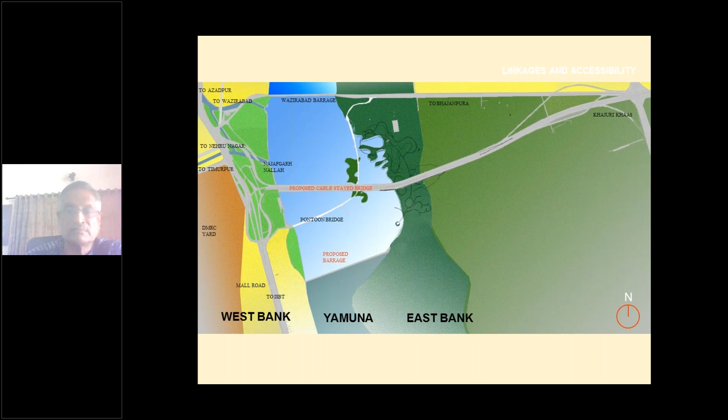Based on this, the project as such, right in the beginning, was a complete tourism destination for that part. After the concept was prepared, it was presented to the Delhi government.

It was decided to divide the project into two: one is the tourism destination, which has a number of very unique tourism elements, and the other is the bridge itself. A decision was taken that for the first part, we do the bridge first, and then take up the tourism destination part later.

So that decision was taken, and then we started working on the detailed design of the bridge. Right in the beginning, we divided the entire bridge project into three parts: the western approach, the eastern approach, and the bridge itself. These were the three things, and we know that the bridge became a signature bridge.

We have discussed in detail how it became a signature bridge. It is because of the background of the Commonwealth Games, and the Chief Minister of Delhi, Mrs. Sheila Dikshit, was very keen that we should create a structure which has not been done anywhere else in the world. That challenge was taken up by the consultants and Delhi Tourism, and it was decided to have a signature bridge which should become a signature structure for the capital of this country.

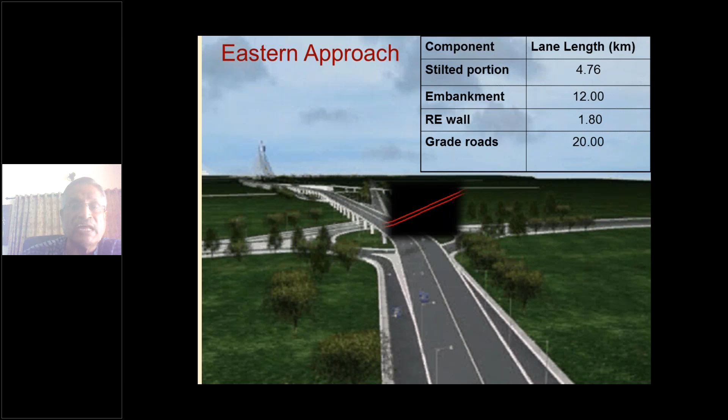And we come to the structure that we are going to discuss today, the signature bridge. After a lot of discussions, which we covered in detail last time, it was decided by a high-powered committee, including the cabinet of Delhi, that a structure of this particular shape would be adequate and good, and probably that kind of structure does not exist anywhere else.

So this is a slightly backward slanting unsymmetrical pylon, unlike the normal cable-stayed bridge. It is a cable-stayed bridge, but it is unsymmetrical, totally slanting backwards, and with a set of cables in the front, supporting a free span of 251 meters, and 4 pairs of backstays to take care of the variations in the loads. So ultimately, structurally, visually, it is a very striking and beautiful, dynamic looking bridge.

And in the structural view also, it can be said that it is a very ingenious and dynamic concept, because what is happening here is the weight of the pylon is carrying the weight of the deck. The pylon is trying to fall back, which is kept in place by the deck, and vice versa. Any change in the load due to live load or any other thing will be taken care of by the 4 sets of backstays. So this is the concept. So it is a structurally dynamic structure, very striking and very challenging, both in its design as well as in its execution.

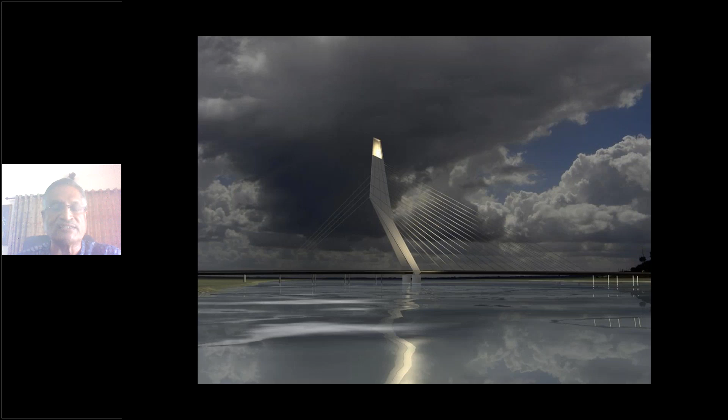It will have a viewing platform on the top, totally glass, almost 25 meters high. People can go to the top through the lifts within the structure, reach the top, and have a nice view of the city of Delhi. This will be almost 165 meters above the river level or deck level, so almost twice the height of Qutub Minar. Qutub Minar is about 75 meters, and this is about 165 meters. So this is the basic concept which is approved.

So this is the way it should look. This was the idea. The designers have been very ingenious, that they were able to simplify such a complex thing in creating the structural elements to decide the load path. So essentially, it is like an open book on the top, 2 sheets trying to open or close, which is supported by two legs splayed in either direction and held in position, pulled from the other direction by 16 sets of cables, held back by the structure's own weight, and variations taken by the set of backstays.

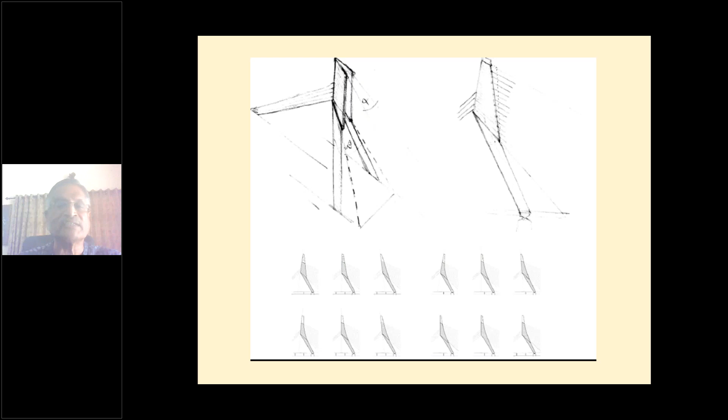So this is the concept that has been decided. Apparently very simple, but at the same time, hats off to the designers who have used such a simple concept to get a complex design done. So this looks like a very welcoming namaste to all the people. So this is the idea. And the architectural things were finalized, like we discussed last time.

And the same thing was converted into a structural system, a line sketch produced from the architectural concept. And this is the way it will look. We have a pylon which has two legs, splayed in both directions, going up all the way and joining somewhere in the middle. And from there, the steel pylon rises, with 16 sets of stay cables in the front, 4 sets of backstay cables, and the top glass fascia.

And on this side, on the left, you will see that the bridge ends there. There is a 1 meter wide expansion joint because of this 251 meter span, which has to take care of the expansion and contraction due to temperature. So the expansion joint on this side is almost 1 meter wide, and a very special expansion joint has been put there.

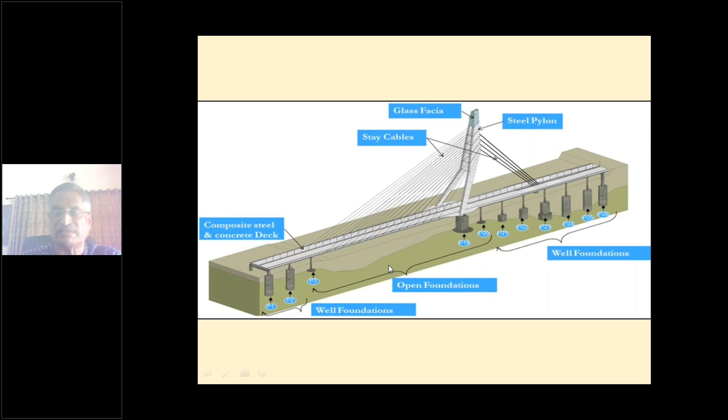So that is the way the whole concept is there in very, very simple terms. These are the basic elements. So in terms of the dimensions, this is the way it will look like. You can see the cables and the pylon head, the cables and the foundations which is there.

So one of the issues which has confronted the construction was the pylon. I mean the backstay ends here, and the backstay will be in tension, and the entire tensile force will have to be held down by a huge deadman here. So creating this one has created a major design challenge and construction challenge. We will have a look at it later as we go along.

So the deck itself is a marvelous structure. It is 36.2 meter in width. That is normally a longitudinal span of a normal bridge, the width itself. So it creates 8 lanes traffic plus 2 service lanes. So that is the way it has been created. So the concept is to have a single deck.

Normally, a bridge of this type will have 2 decks and 2 sets of cables. I mean, 2 sets of independent bridges will be there, like in Bombay or anywhere else. But the problem is, while traveling through such bridges, one gets a very, very complex view of the entangled nets, which is cable nets, which are coming while you drive along. So the architects and the designers decided that let us have a clean image while traveling through the cables.

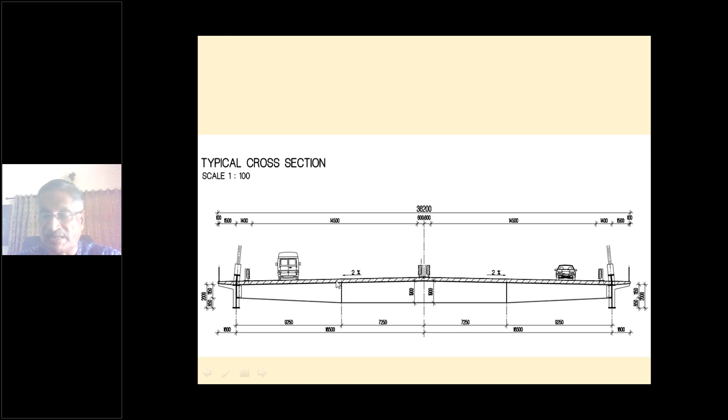So maybe on such a large scale this is the first time it has been done in India, even though it has been done elsewhere in the world. In India for the first time we have tried to do a steel concrete composite deck using precast decking. So this is what has been done for the decking. And then we went into detailed design, and various sections were evolved and used for sections analysis, simple analytic analysis, and other issues which we discussed last time.

We have done the design, and then it is verified by a very detailed 3D finite element analysis. For calculating the forces, we also did detailed earthquake analysis. Response analysis was done. Even a site-specific seismic study was done by the University of Roorkee. And for the wind, a wind tunnel test was done in Germany.

Last time we discussed the implications of those studies, and using all of them the forces were calculated, and with simple studies we finalized the sections. The designers finalized the sections and the thicknesses of the plates and everything, which was verified several times by iterations and finally validated through a three-dimensional finite element analysis. So this is what has happened. So these sections were done already.

Detailed drawings were prepared, more than 1,000 sheets, and this had to take into account the construction methodology. So while designing and detailing, the construction methodology, the erection methodology, the fabrication technology, all those were in consideration. With all those things in place, only then were the actual structural drawings issued, so that the design we create we should be able to implement when the construction is carried out. So that was the basic concept, and a whole lot of detailed engineering had to be done.

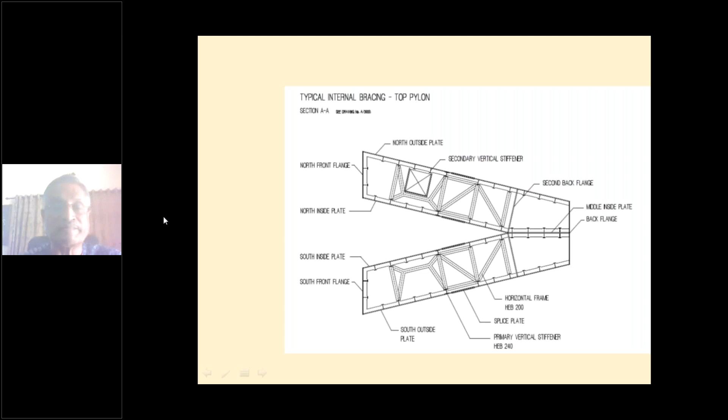For this, we had very great help from Professor Miranda of Italy. He has done fantastic work; the entire enabling structures were designed by him, and the complete detailed engineering was done by his office from Italy. And the bridge is one of the major innovations that has been done. We have tried to discuss it last time.

This time it's important. So what we have done is, for erection purposes, the entire pylon was divided into segments, 1, 2, 3, 4, like that, from bottom to top. And we have a junction here where the two pylons meet, and then the Namaste begins. So that was the longest joint here. And then there were pieces which were to be fabricated, checked, brought here and assembled here. So this is the way it has been done.

And if we had done the normal way of putting these pieces together, we would have required a whole lot of plates and a whole lot of bolts. So with the kind of size of the segments, practically the entire surface of the bridge would have been covered with only bolts. So this was an issue which was discussed, and the architects were not ready to have it.

So the idea was brought in to directly transfer much of the dead load from one segment to another by providing a mating surface. The top and the bottom should mate so that the entire vertical load is directly transferred into the bottom, with very little bolting that can be seen outside. So this is one of the major innovations which has been done. Unlike in many places where the segments are connected through bolts, here it is directly transferred.

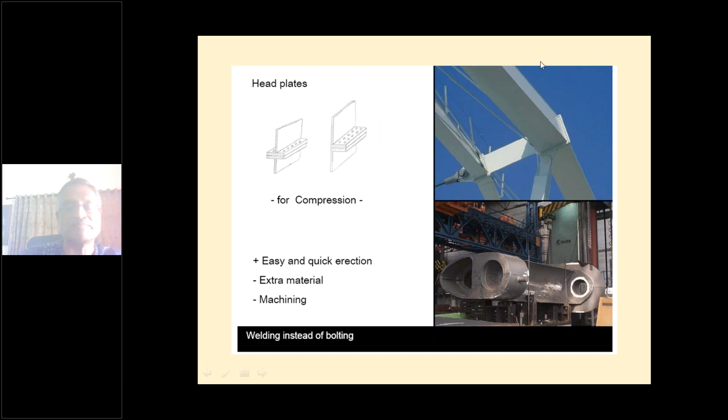Another very interesting thing that has been done here is the pendulum bearing. So this is where the stay cables at the back come and join the deck. Now the problem is these stay cables pull. There's tension in the stay cables, which will try to take the bridge deck up.

So it has to be held down, and to hold it down, you require a dead anchor, which is a very heavy weight. That entire load has to be resisted by a dead anchor with a large factor of safety. The added difficulty is that the bridge is a moving bridge. Because of temperature, the bridge deck will be moving along the longitudinal direction. So it had to take two actions.

One is it should take the entire tensile load which is coming here, it should be pulled, and that pulling load should be transferred to the dead anchor. At the same time, the bridge should move as the temperature rises. So that is why this pendulum bearing has been created. It's a huge structure, but it has been executed successfully here.

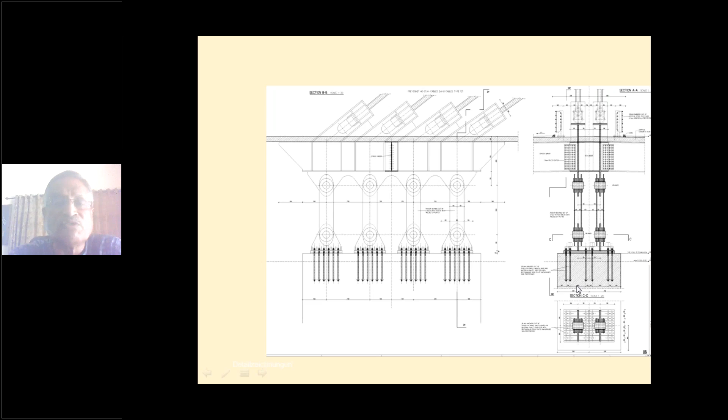And another one which we have discussed already is the decking for the steel concrete composite structure. Here the entire decking is precast; except in very small places in situ concrete has been used, but otherwise the entire decking concrete is precast. So these beams are going, longitudinal beams and cross beams are there.

You create rectangles here, and in these rectangles you provide the precast slabs, and then it is connected to the deck through shear studs, and then in situ concrete is done between the two elements there. No shuttering is required because the top flange of the beams will act as shuttering.

So all you have to do is place the elements there, see that they are enmeshed between the two, and the shear connectors are available, concrete it. So that gives a faster and very quality structure. So that was another major innovation that has been done in this project.

And painting work has also been done on this bridge, because it is an iconic structure. Yamuna's motif of the peacock feathers was painted onto the structure, so it has to be done along with the painting, which is a durability factor. So this was also done, very interesting. You will be able to see that later as we go along.

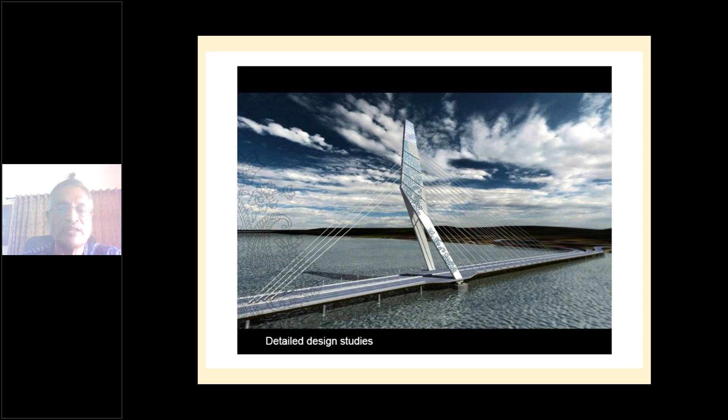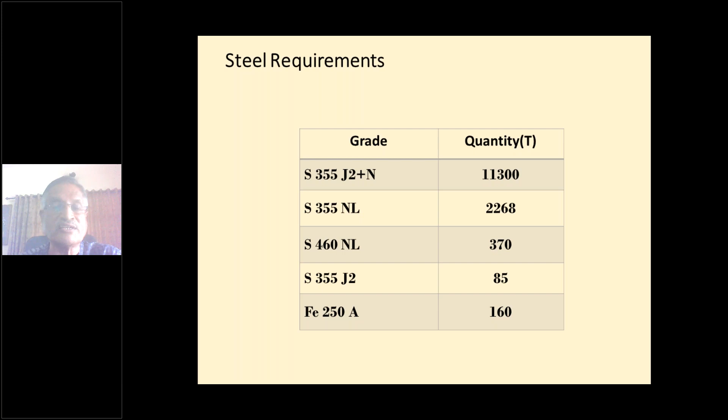So the total reinforced concrete was about 45,000 cubic meters, reinforcement of almost 5,000 tons, and structural steel of almost 14,000 tons were used. In addition, thousands of tons of enabling steel was used, and various grades of steel. Some of them at the time were not available in this country, or even in China it was difficult. They had to be specially ordered. Very special, high quality steel was used for this one.

And the expansion joint between the main bridge and the western approach is also very complex, because from there it goes into a sharp curve. At the same time, it's also split into 3 different bridges right after the expansion joint. Creating that and adjusting the whole thing in the expansion joint was very interesting work, which has also been done successfully. So it is very innovatively designed.

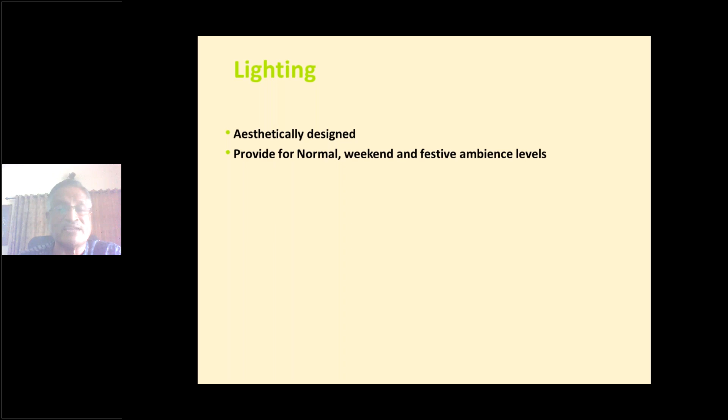Lighting for normal, weekend and festive ambience levels has been provided. So that is already available here. One of the most unique things is the bridge health monitoring system, which will take care of all that is necessary, and which will also validate the whole design that has been done so far. This itself is a huge topic for discussion, and as the data is flowing in, we should be able to present the bridge health monitoring system live some other time.

So there are a lot of things measured here. The wind, temperature, rain, precipitation, and the cable force are measured. Vibration, temperature and traffic are also measured here. Displacements, extensions, movements, corrosion, seismic measurements, relative humidity, all those things can be measured by sensors, and the data is being transmitted live at every time, and it goes into a computer.

Right now it is not in India, but from there the data flows back into the bridge maintenance unit, and it will give you a dashboard on which these factors are available. And whenever there is an issue which requires attention, a trigger will come and you can take action based on that. It's a very detailed system.

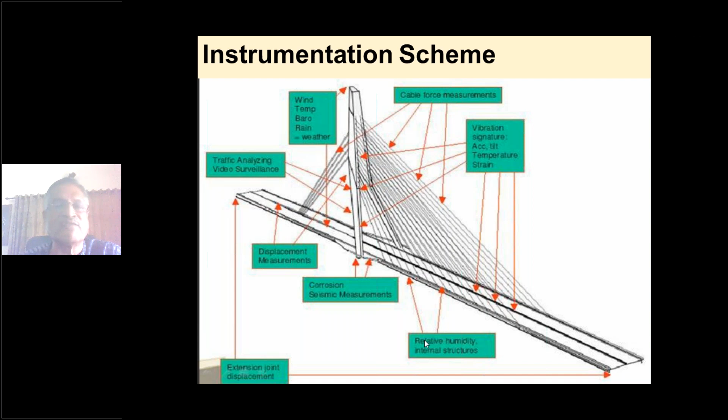So it measures the environmental conditions, displacement, distortion in geometry, the accelerations, the loads, corrosion, and fatigue, as we discussed here. And there are other issues. The lifts were to be capable of incline travel, a detailed stay cable cleaning system, an arrangement to lift the weights, and robotic cleaning units. These are all for inaccessible areas. These are all being done.

Now let us get into the construction mode. That is part 2 of it. If you look at it, the bridge looks like this when construction is to be done. This is the pylon, the main pylon, inclined and asymmetrical, which is supported on an open foundation, which is a very interesting work that has been done.

It is almost 16 meters below the bed level, and the water level is at the ground level. So going down all the way to 16 meters and constructing a huge foundation for the pylon was a challenging job. It's a very interesting thing.

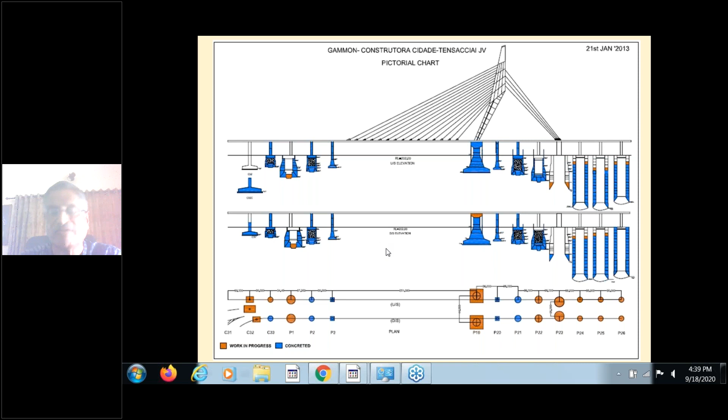And then we already discussed this P23, as we usually call it, created because of a specific problem encountered when we went for construction. So that is also a very interesting design. And then there are a number of well foundations, which are normal, but they are all very big wells, not normal wells. Many times we had to do many innovations to get this project done. So we'll have a brief look at how these things were done.

So the well foundations, you can see, because of the time constraint, because you get time only in between the flood time, most of the well foundations were taken up simultaneously. So you can see the bustling activity in which most of the wells were started simultaneously and work is going on in each one of them. They are all at different stages of completion.

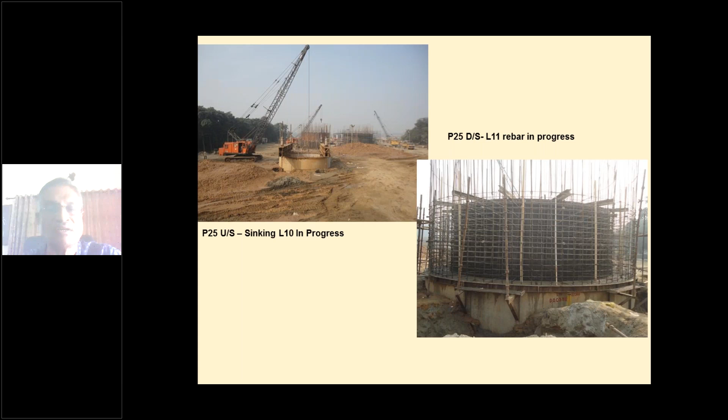So the different wells are in progress, with sinking by kentledge, reinforcement, and then concreting. This activity is going on round the clock and balanced so that one follows another. It's a very complex project management system in which everything, right from the concrete production, steel bending, and the kentledges, had to be aligned so that the work goes fast. Concreting is being done in one place, reinforcement in another. So this is the typical well sinking process by kentledges, and it has been done successfully.

There were no problems. These are various scenes, and then the concrete had to be cured, and the work is going on. They are all of unusually high diameter. The biggest one, P23, is almost 23 meters in diameter. The rest are almost 16 meters and 12 meters. So these are all unusually large foundations, large wells to be constructed.

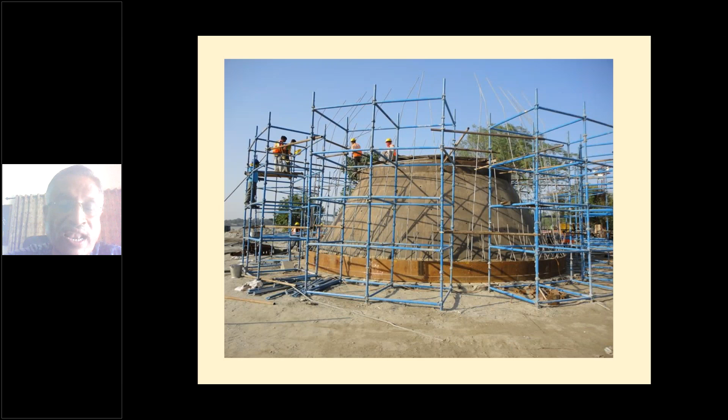So this is a typical well curb. A normal curb will have about a meter or 1.2 meters, but you can see the size of the well curb itself. In one of the wells done here, the curb height itself is so high. You can see from the size of the people the enormous amount of work involved in creating the formwork for this well, which is very ingenious.

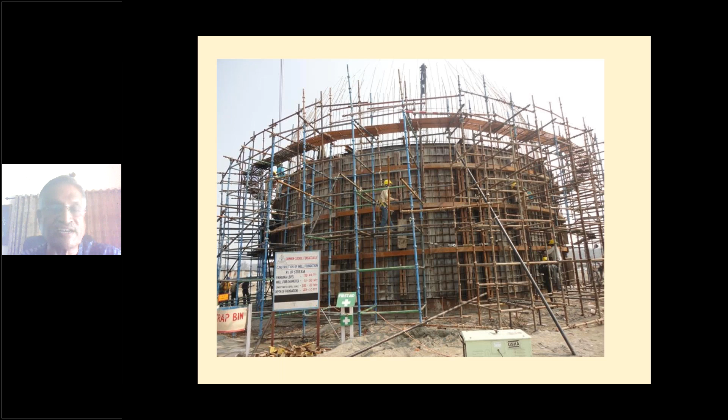And then the work goes on both in the daytime and at night, in a complete project management mode. This is the typical shuttering for the height of one typical pour. The shuttering is prepared, the staging is done, then concreting, and then pushing it down through kentledges. So this has been done.

This is the typical steel. You can see the amount of work involved, so much labor involved in creating the reinforcement for a large well like this one. You can see the size of the people versus the size of the well. It's a huge effort which has been done here.

And when we come to the open foundation, which is very interesting, we had to go down 16 meters right in the middle of the river and underwater. The water is standing there. So the only way was to create a barrier against the water around this particular pit. First, that has to be done. So this is using the vibro hammer to drive down the sheet piles.

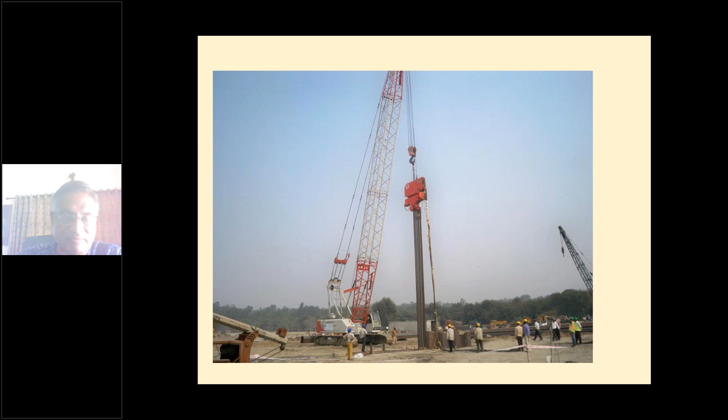With the sheet piles, you created an enclosure and then dig from top to bottom. This is the typical top-to-bottom construction methodology employed here. You can see the work has just started. The first few sheet piles are being driven into the ground, and this is the way the piling is done.

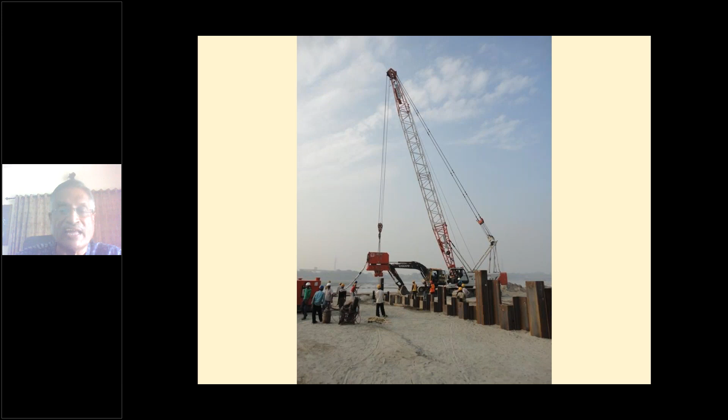Sheet piling is done using a vibro hammer, and things are going down one by one, linked together. Once all four sides are completed like this, a barrier is created. We can start digging, and waler beams are done so that as you go down from top to bottom, you do the excavation. You keep your sheet piles in place by waler beams and a very sturdy waling and other steel structure, so that the enclosure remains in place while excavation is going on.

At the same time, you should not forget that the whole thing is underwater. Water is there at the ground level itself. So the water which is coming and seeping through the sheet piles had to be continually removed, while the excavation is also being done. A very challenging, continuous work, and the whole thing has to be completed underwater. So this is what has been done.

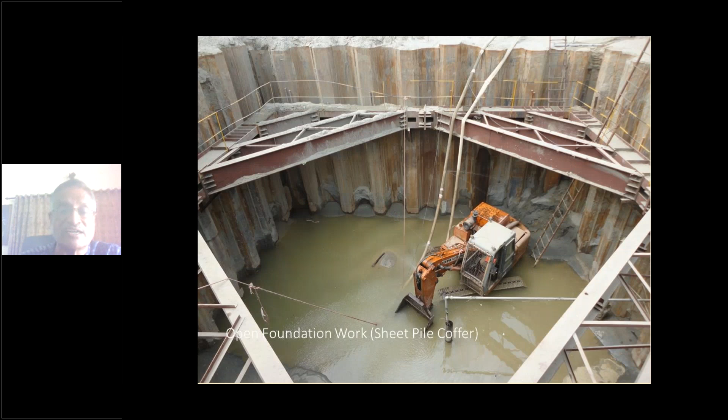It's a typical thing, it goes down to the machine where water comes. It has to be pumped out and excavated, continually. Inch by inch you go down to the different level, and then you start your pier.

There are two footings, one of them for the pylon. The amount of concrete, steel, and human effort required in creating a structure 16 meters underwater and then bringing it up has been a huge challenge for the whole project.

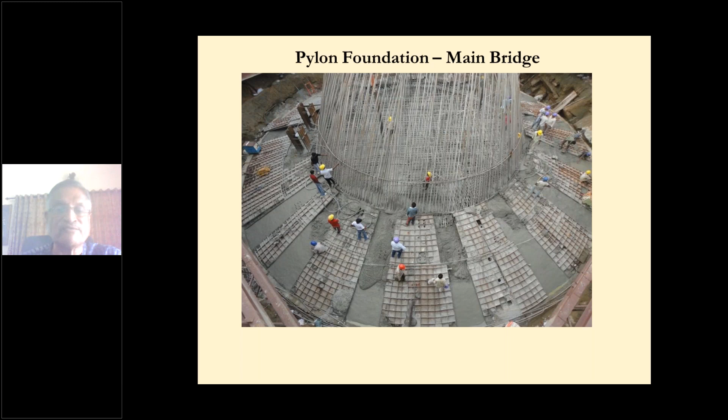You can see the reinforcement being done. Look at the size of the people versus the size of the structure. Then, one by one, it's a hollow pier that has come up inch by inch. So this is P2. Now we come to the pylon, which has been completed.

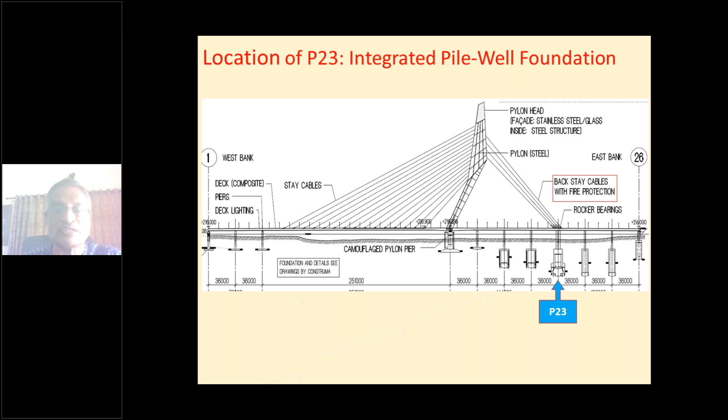Now we come to P23, a very challenging, unexpected problem that shook the project. Geotechnical investigations initially could not be done because the forest was there, and we were allowed to do only a single bore at each place. While doing the detailed work, the permission from the forest department came much later. When we did the detailed analysis and investigation, we found a major surprise: the rock is slanting.

We had to provide a well because that is the only way to handle the dead weight. But when we do the well, we will not be able to get a horizontal surface onto which you can put it. Only two solutions were available: either dig into the rock till you get a horizontal surface, which is impossible because the rock is inclined almost 45 degrees, or with a 23-meter diameter, cut the rock underwater to seat the well in place. That was not possible at all.

So a very innovative solution was worked out, which had been tried once before by the government itself, at Jogighopa. It was very challenging, detailed engineering work. It was decided that we would have a combination of well and pile. This is the way the rock profile would be—after investigation, it was found the rock profile would be such that one end touches here while the other end hangs in the air.

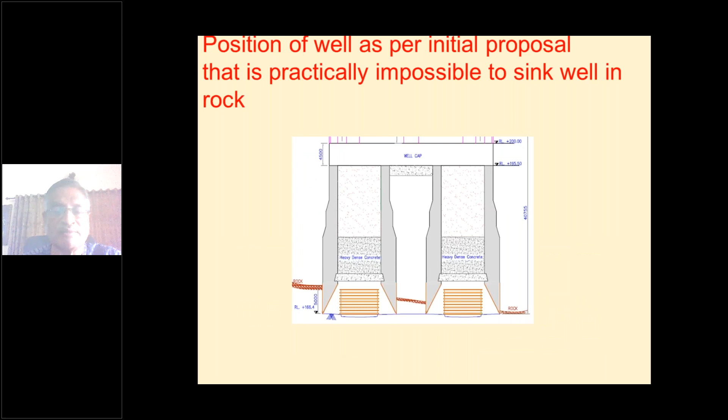So it was decided that we would have 16 piles in each of the wells, and these piles could be driven after the well reaches the rock. The piles can be driven into the rock to create a pile system onto which the well can be supported, and it can be cast from the top. This was the solution that came out after the huge variations confirmed by the geotechnical investigation. One thought was to break the rock, which we found humanly not possible. The only way was to create this well-pile system, which was found feasible, but with an enormous amount of input required, because each of these piles would be very big.

The 1.2 meter diameter pile had to be cut substantially into the rock, because this has to take into account the load as well as the shear. So that was the issue. The 16 piles in one well and 16 piles on the other had to be cut 1.2 meter diameter substantially deep into the rock to get a grip, and at that time in India, we did not have any kind of equipment to do that.

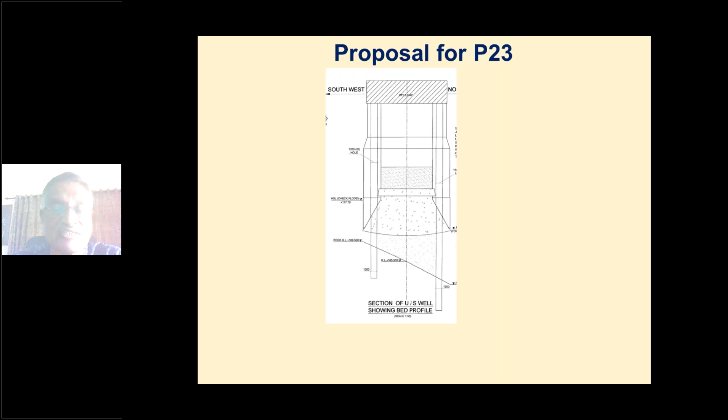So we had to bring in equipment from abroad. While the work was going on, we found it stalled because of the P23 well, and we had to import two machines which can cut the rock and create this well pile system, and we had to wait for that. When the machines came, the project could be completed. The P23 well could be completed.

So the idea is to have a well which will be standing on top, and from there the piles are driven down into the rock with the full grip length, and the well will be supported on the pile system. Then concrete is used for the usual plug and the project is completed. Apparently it looks simple, but it is extremely difficult to execute because it requires heavy machinery.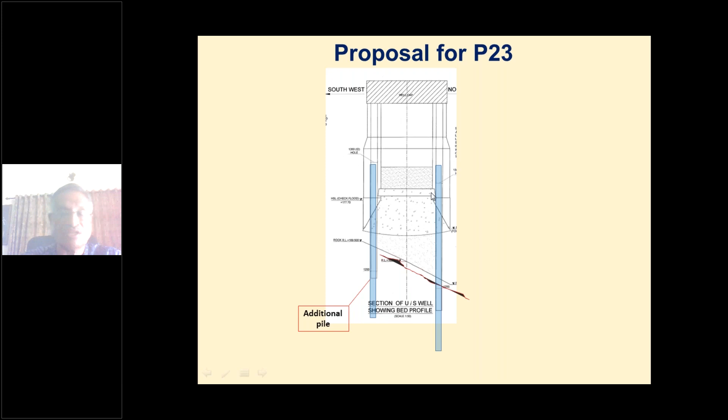So we brought two machines from abroad, Boma 2 rigs. Only after these machines arrived could we drill through the pipes kept there. The tubes were kept there while casting the well, right from the curb onwards. These tubes were there, and through them, after the well reached the rock level, the piles were driven into the rock using these Boma 2 machines.

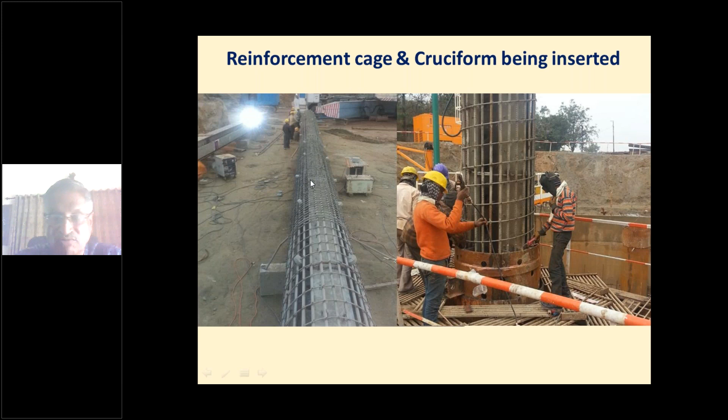So this has been a very challenging and very heavy engineering work. To take care of the shear in the pile, we had to use a cruciform, a typical X-shaped, cross-shaped steel structure inside, plus steel, and the whole thing has been fabricated. You can see it lying here, taken up and sent down through the pipes. While creating the well curb itself, all these 16 pipes were to be incorporated in the well curb.

You can see the amount of fabrication work required for this well curb itself. It's a very complex fabrication of steel, and then this was sent down to the rock level. You can see the structure with all the people working there, giving a comparative size between the man and the tube sizes. This is the way it looked just before sinking starts.

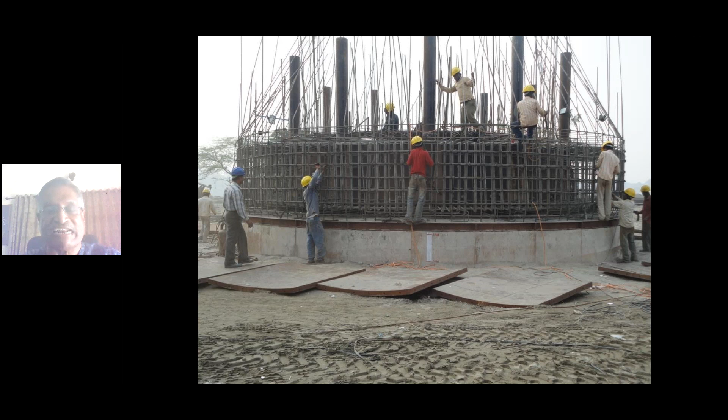Slowly the sinking started with heavy measurements and balancing work every day. Slowly it goes down, and then it comes up. It goes down and the concreting is done, the well is being cast, and one by one the whole thing comes up, and the work has been completed.

On top of that, we had to provide a connection between the two wells with a very heavy concrete well cap, and on the well cap at the center we have a short column that is under tension, and on top of that is the pendulum foundation. The pendulum bearing will connect the deck and this well foundation.

Very challenging work, very interesting work, but it took so much creativity, pain and effort, both in terms of engineering and administrative skill, to come out of this dilemma. But finally, successfully, this has been completed, and this is the way the place looked at that time.

When it comes to fabrication, we tried to get the bridge fabricated in India. But when we looked at the enormous effort required to get very accurate and quality staff here, even though we visited most of the major fabrication yards in this country, we could not get the proper place. We also visited several other countries nearby, in the Gulf countries, Italy, and many other places.

Ultimately, we found that the kind of size, output, and mechanical arrangement equipment were available at that time only in Shanghai, only in China. Finally, an arrangement was made with ZTSS workshop in China, a huge facility, very willing to undertake the work because they wanted to learn all these things. Even for them it was a novelty, but they took up the challenge and done an excellent job. So that is what I must say.

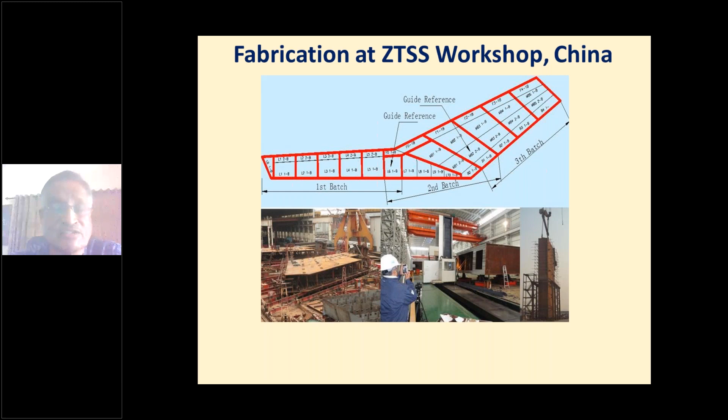So look at the size of the structure. This is the first block which has been kept under the pylon, one side of the pylon. The weight is 450 tons, one piece. So the whole thing had to be fabricated.

Here the issue is fabrication, so that when the entire thing is fabricated, what we want is available. That means the whole thing had to be converted into drawings, detailed shop drawings. A huge effort, and only with major software like Tekla and other things could they do it. Fabrication drawings were created, cutting plans were made, and very detailed geometry control had to be put in place.

The regime was very tight. Many times there were arguments and problems between the two parties, but ultimately the whole thing came out. You will see that it fitted like anything. But the pain that had to be taken was huge.

So this is a simple one, a single piece, 40 tons. And this is the kind of complexity in this one. This is the bottommost piece of the structure which will be supported on the bearing, and one leg of the pylon will come on this one.

So the plates were to be done, and the quality started right at the factory where the steel plate is prepared. Our quality assurance team went there, took the samples right at the ladles and tested it, and only then were the plates allowed to be moved from there. And here it came, and they were doing the work.

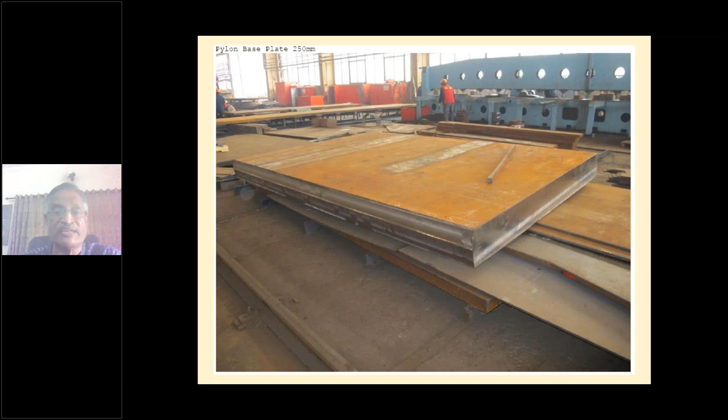And this is the kind of steel plates that had to be used. This is one of the plates which comes at the bottom, and you can see the thickness is 250, that is 10 inches. One single plate of 10 inches thick. So this is the kind of plates that were to be created, and then this kind of things had to be welded to create the structures that we wanted.

And this kind of facility was not available at that time in India, and even plates of this thickness are still not available, because creating that itself is a challenge. Then to get the quality done, the sufficient quality metallurgically, is another job. But anyway, the company could produce both the steel as well as the fabrication.

So this is the way it is done. You can see the bottommost piece, the kind of space in which people have to sit down and do the welding. Hardly a space to sit there, and you have to do the welding sitting there, and several runs have to be done, not just one or two. It's such a hot environment. You have to sit many times, and then the quality assurance team will go and check each place that the welding is correct and record it and pass it, and then another auditor will come. So this is the kind of very involved work that has been done there.

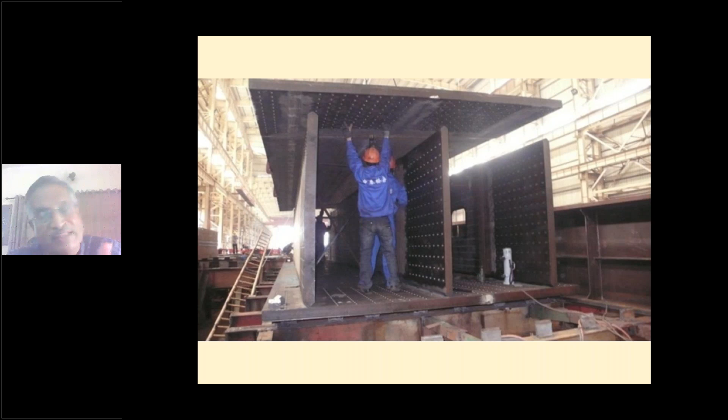You can see the bolting, and you have to see that this bolting will mate with another thing. So that is the kind of geometry control, a complex thing, because it also involves temperature, because temperature will distort the whole thing.

So the geometry control guy has to take into account the possible temperatures, anticipate them, and create this geometry control, so that the bolt holes which are already pre-prepared will match with the plate in another one. Extremely difficult, complex. Only by such a very tight regime of geometry control could the whole thing be achieved. But they had finally done it. So this is the kind of things.

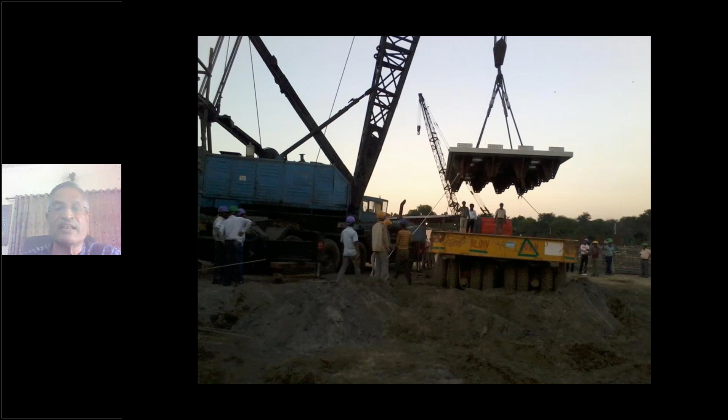And then this is the piece to be put on the top of the pylon, which will take the bearing. It's a base plate for the bearing, which also has been created and brought here and put on the top of the pier. This is the typical yard on which the work was going on. You can see the kind of space that is available.

This is right on the Yangtze River. Right from there, they got a 4-kilometer long berth, from where they will complete and load it on the ships and send it to every part of the world. So that is the kind of huge facility these people have created for welding.

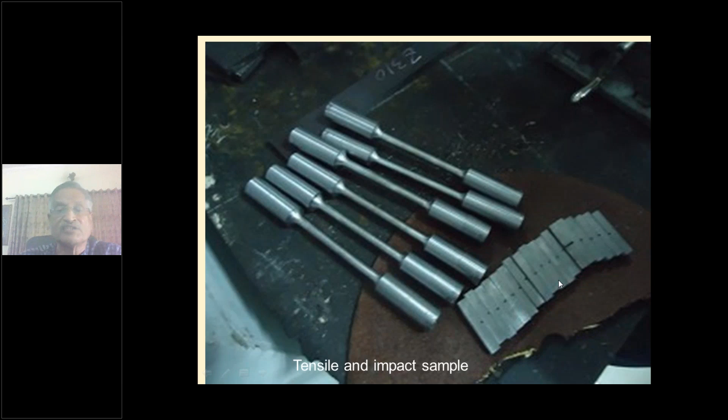And for each of these plates which come here, we take samples, and on these both impact and tensile tests had to be done. You can see both the things. Pieces are there for tensile testing as well as for impact testing. These pieces are collected from each of these plates, and then they are subject to the tensile test as well as the impact test.

And the welding is going on at the same time. Testing is also done by 3 methods, up to X-ray test, depending on the importance of the joint. And this is the kind of fabrication facility they have. Most of them are automated, but at the same time, a whole lot of manual intervention is also required. Most of the welding is automated, and it has been done by them very successfully.

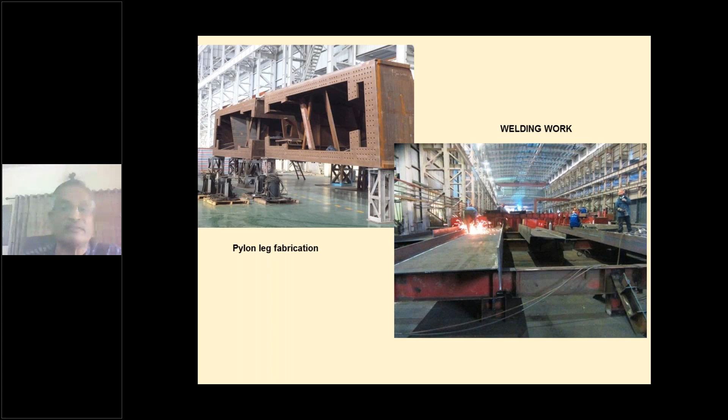And the pieces were created and started coming out, checked, and this is one of the legs of the pylon. So facilities like this, they have a lot of welding space. Practically the entire factory had to be dedicated at one time, so that all these pieces were simultaneously being done.

And one of the issues I told you was the two surfaces had to mate together, and the level of accuracy was less than a millimeter for every meter, for a length like 20 meter, 15 meter, 12 meter, which was one of the most challenging works, because this is almost a 16 by 12 surface, and the whole surface has to be brought into that kind of an accuracy, then only it will mate with the other. So several times they had to do this work, on such a huge piece.

Only after fabrication can this planing be done through a milling machine, and that itself cost them a whole lot, because on our insistence they had to bring two machines from Italy to do this job. And you do the planing, take it out, assemble them, see there are problems, bring it back, redo the job and take it back. Such a painful, laborious work, but it has been achieved by them due to due diligence from our geometry control and quality assurance people and our supervising people there.

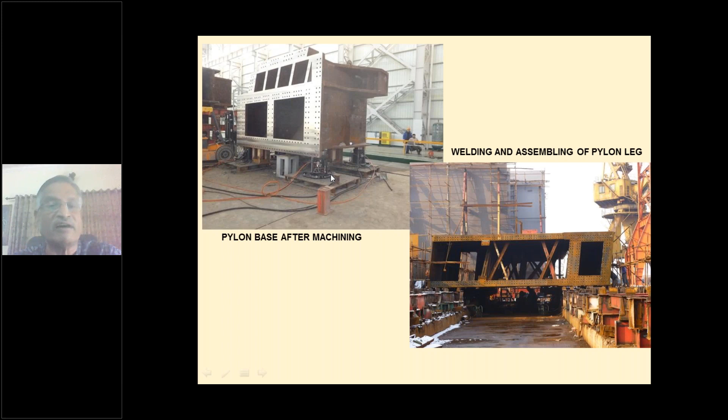So this is the kind of surface they created by planing, the accuracy they got. You can see the size of the surface which had to be mated, and the amount of accuracy to be obtained, possible only through machines like this. You can see one piece is being planed, and simultaneously this is the machine which is doing this job.

Doing this job, and see that your accuracy is all monitored on a monitor. You can see the whole operation. You don't have to stand there. You can sit there and see every millimeter of it on the monitor and get the accuracy of the machining done. But at the same time, after doing all those things, when you go out and assemble, many times errors were there. You had to reassemble, decouple, and bring it back and do the work again.

Okay. Then one of the major issues is the trial assembly. All the pieces that had been done had to be assembled once to check the accuracy of the joints, and then only it was allowed to ship.

So after fabrication has been done, two more important steps were to be done. One is mock assembly. Piece by piece it will be assembled, checked, and geometry checked that everything is fine. If it is not there, take it back into the workshop, redo the whole thing, bring it back and reassemble and check it. Only once it is passed, you will be allowed to go into the paint shop.

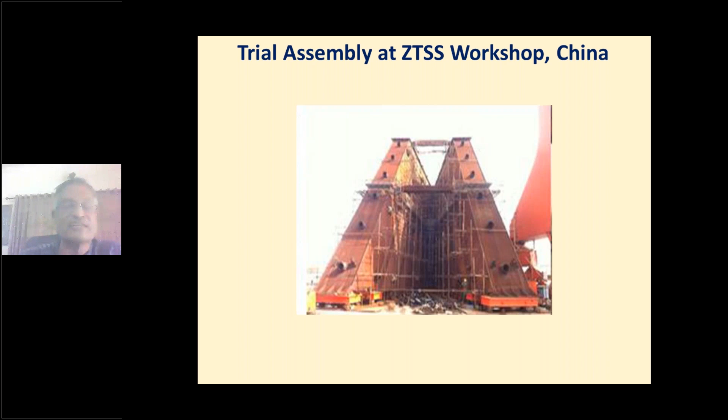So this is one of the two iron legs, plates are being connected. You can see the huge assembly which has been done here. Mock assembly of various elements. So this is the pylon leg that we have been discussing. Base is getting done, and the entire deck trial assembly has been done, and only after everything is set, you can see the deck here, right, going through the pieces.

This is the central; the whole thing had to be completely assembled there, checked each bolt hole, check bolts have been placed there, you can see, and only when everything fits, everything done, everything corrected, this will be taken into the paint shop for painting.

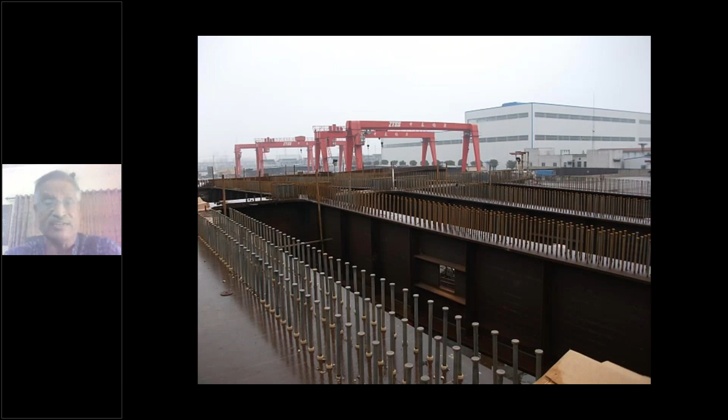And before that itself, we have to do the shear connectors in most of the deck beams. It was decided that shear connectors will be done in China itself before bringing it, even though it creates a problem of logistics. It was decided that it will be done here because thousands of shear connectors have to be done. It will be very difficult to do it once it comes to India, because it will spoil the painting also.

So it was decided that the shear connectors will also be done, and then you can see the mock assembly of a very large portion of the pylon support, and both sides have to be assembled to see that it is accurate up to millimeters before it is taken. This is another shot of the mock assembly.

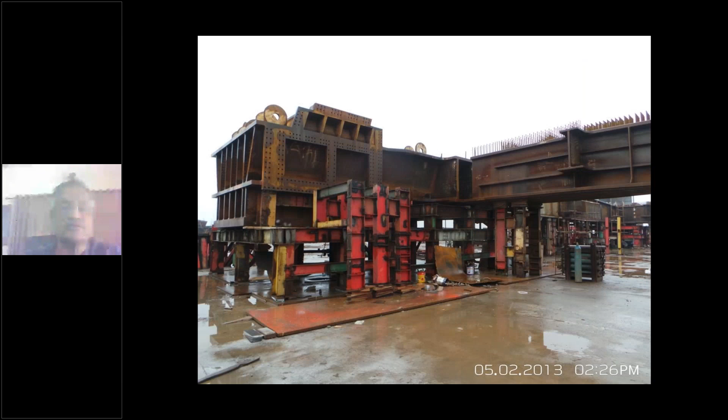And once it has been done, this will be taken to the paint shop, which is a completely covered area in which no dust, nothing is allowed, and painting will be done. 4 layers of painting have to be done, and each layer will be checked by the QA people. They will come and test it.

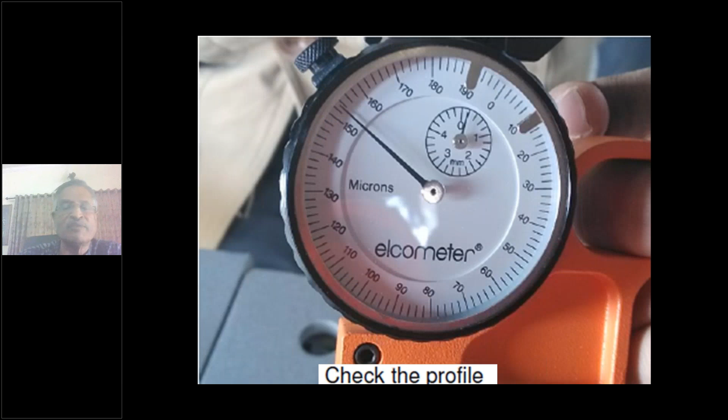Each of the 4 layers was given a different color, so that with one look visually itself, you will know whether the painting has been done properly or not. So each of the 4 layers had 4 colors until the final color came. And then the machines are there. The profiles can be checked by a number of tools and equipment. So painting was checked very thoroughly before this was allowed.

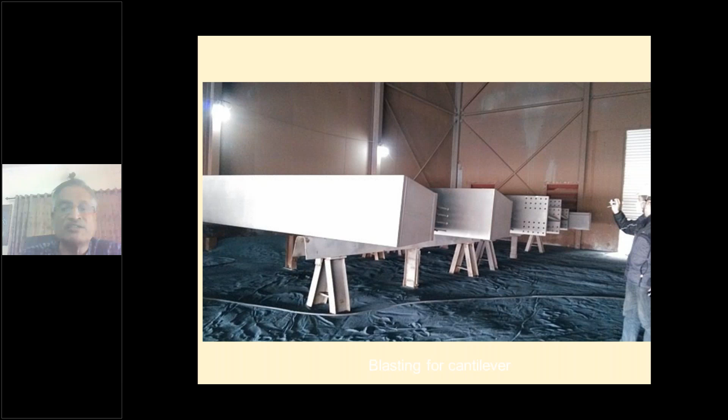This is the primer coat, and then the slip. I mean, for the bolt also we had to do testing for slip factor before we take this up. So this is the paint shop. No air circulation, nothing. It is a totally enclosed area. Painting is to be done with machines. One by one, the layers will be done, tested, and the final finished coat comes

and it comes outside. And from there, before it is shipped, again an audit is done of everything. Even after the sandblasting, the profile is checked and only then it is allowed. So painting is done.

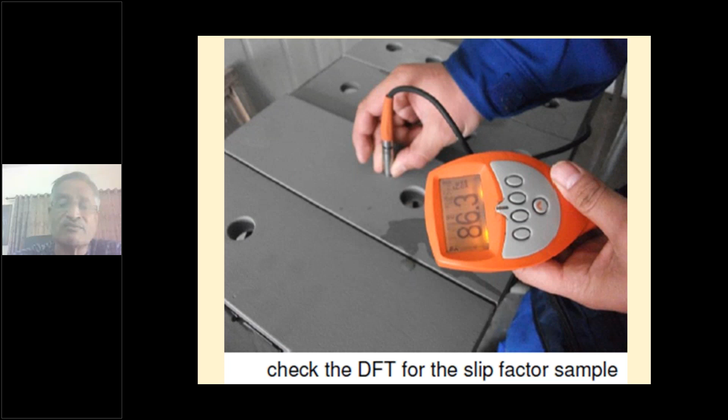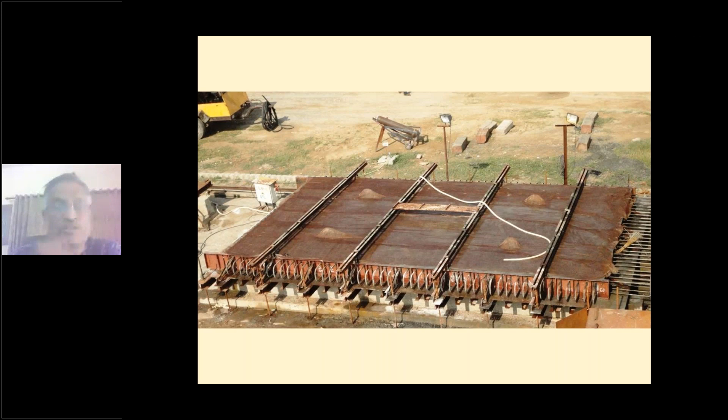And in parallel, the manufacturing of bearings was going on, both the main bearings as well as the pendulum bearings, because only after the bearings are available will we be able to carry out the erection.

Next step is transportation. These elements are huge. One of the elements is 450 tons, and other pieces may be small in weight but large in size, something like 30 meters, 35 meters, 36 meters. So logistics was a major problem, but it was decided that these pieces will be shipped from Shanghai to Kandla port, and from there it will be brought to the site by road. This has been decided, and that itself was a huge logistical issue.

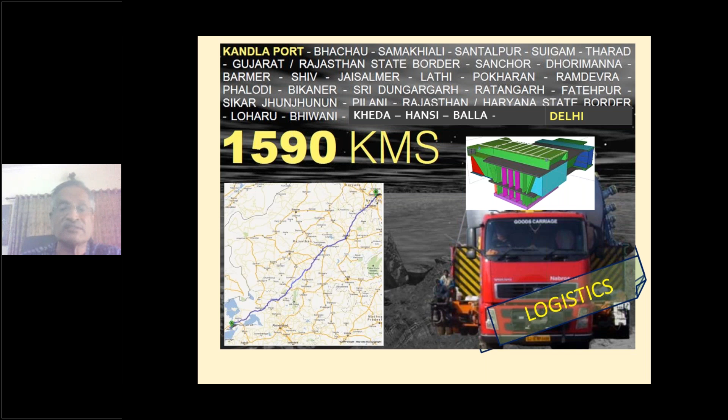We have to cover about 1,590 kilometers with a weight of 450 tons along the roads, and most of the bridges and culverts along the road could not take this load. And there, he had to create special facilities, temporary bridges, temporary culverts, to carry the huge weights of this kind of load. And it took almost 2 months, after extensive route survey and reconnaissance and corrections, before the pieces were brought to the site.

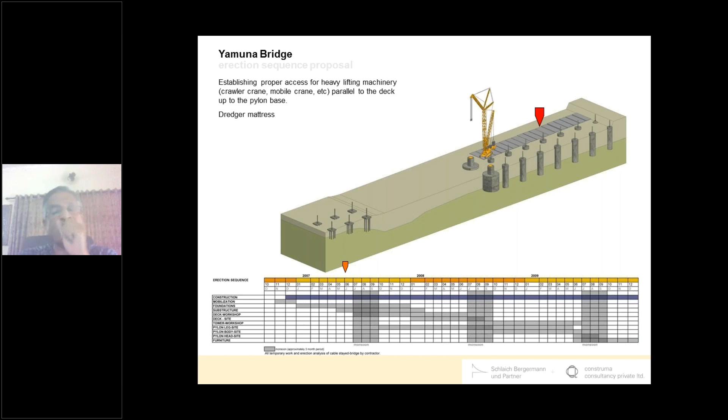The construction methodology was decided right at the beginning before the design started. On a large scale, it's like this. You do the foundations first, and on the top of the foundations put the bearing, and the whole assembly will be done using a huge crane of 1250 tons capacity. At that time, such a crane was not available in our country, so this had to be brought from abroad. And the cost of keeping it there itself was a huge thing. Very costly rentals were there, and the crane was being controlled from 2 countries, from Asia as well as Europe, and that is the kind of equipment that was required to assemble the pieces here.

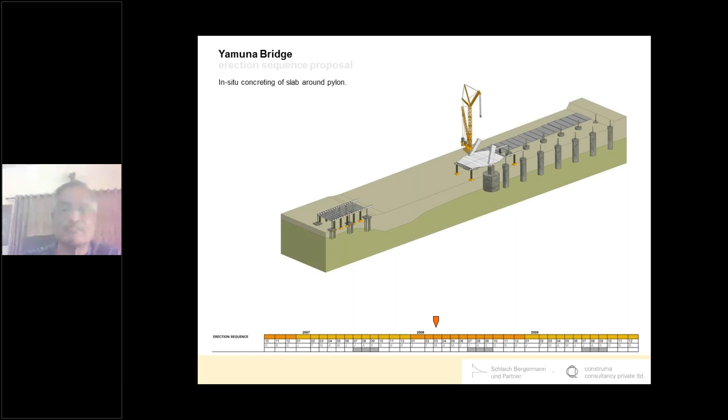And then after the bearing, you will put the first connectivity under the pylon, and simultaneously the deck will start for stability to either side. So this has been the plan, and then the deck will be cast so that you get a base here, and then the temporary supports will be there, and then the next piece will come. They will be connected with a temporary connection. These are all enabling structures, and it goes and meets at the junction of the two. At that time, there will be a temporary support for this one, and then the vertical pieces will be done.

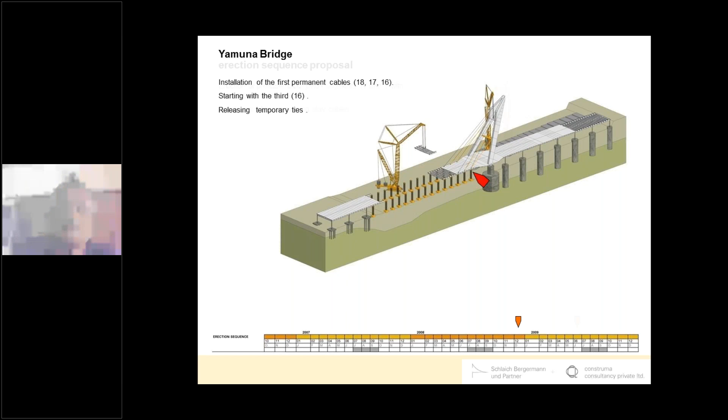Then once it reaches there, after the first piece, the cabling will start in place. So the second piece, third piece, and like that, the pylon will grow, and finally the viewing deck. And by that time both the 16 cables in the front and the back stays would be done. So this has been the construction methodology agreed by all the parties, and this has got into the structural design, detailed engineering, as well as fabrication and erection methodology, everything. It was agreed by everybody, and there is no question of any change later. So this is the way it has been done, and the project is complete.

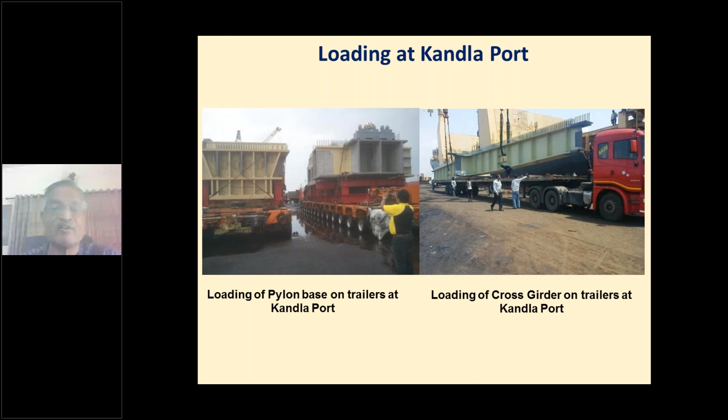So this is the way the pieces have been loaded on these carriers, trailers, and then brought over here. These are trailers with completely hydraulic equipment, so the load is distributed equally onto each of the axles. Some of them are 16, some of them are 24 axles. The whole weight will be distributed equally using hydraulic jacks, and then brought in here one by one. The sequence has been decided. This is the first piece which is brought here. This has to be kept in place.

The first piece had to be brought in here, on the bearing. This is one of the biggest bearings in the world, a 6,500 ton capacity spherical bearing, which has been placed here. Over that, the first piece of 450 tons has been placed. It is an unsymmetrical piece which had to be kept in place through an anchor here. So this is a tie-down arrangement. With that, the whole thing has been placed exactly like this, and only then could you start the first piece.

In the process, the first piece was to be welded. There's no bolting connection allowed. This itself was a huge job because it had to be done at site. This is the base plate which has been concreted, and then the first element has to be welded in place. Huge piece, welding through the day, through the night, for which the area has to be completely covered, and underneath the preheating is to be done, because it's very important that the temperature is controlled, and then a sequence of welding is created, a proper procedure is there, and very highly qualified experts were there.

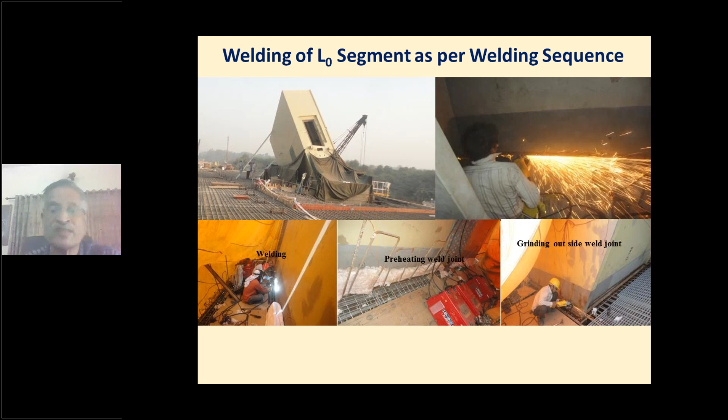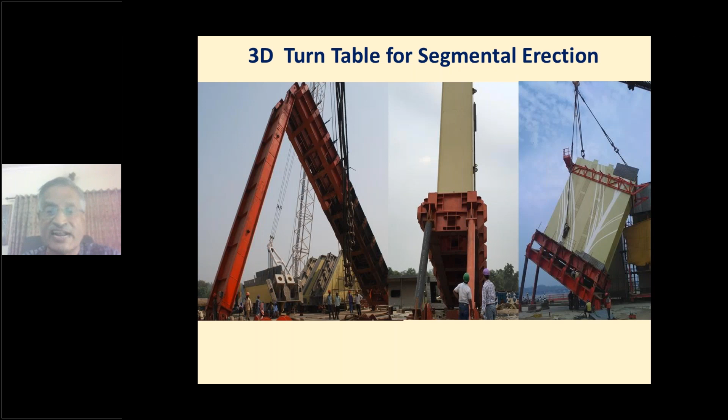And you can also see the painting that has been done here, because a decorative painting had to be done. This is already done in pieces before erection. This has been done at site by an artist, specially commissioned. The artist will tell his name.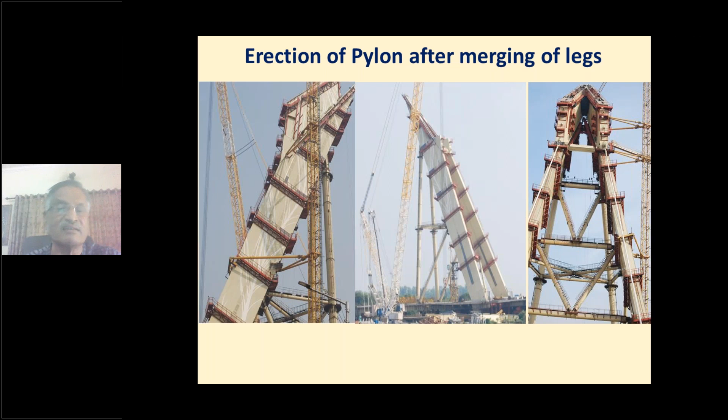But fortunately, and we must congratulate all the people who have worked on this, there was no such problem of a mismatch. That is because of the tight geometry control, tight quality assurance, and tight work during the assembly, the mock assembly, which had been done before shipping here. Hats off to them.

And then one by one, the pieces are in place, coming above, and we reach almost the top level. And by that time the cabling is also being done. I'm not going deep into cables because that itself is a subject.

And by that time, what we do is, for each one, we have to do a stage by stage construction analysis. Every time a piece is placed there, it affects the geometry of the structure, because a load is coming onto it. There will be settlements, there will be deflections, and that has to be taken into account, checked with the design and final alignment, because after all those things, when it is completely put in, you have to get the alignment back.

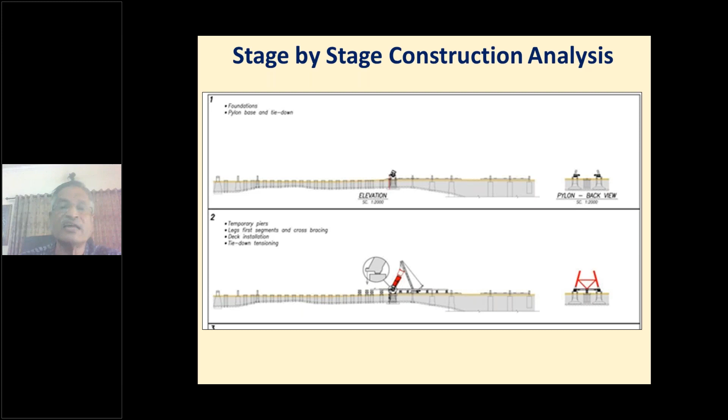So a stage by stage construction analysis is required before you put the piece. The analysis is done, then after it is put there and verified, only then the next piece is put. So this is a parallel analysis which is going on. And similarly, using a Goliath gantry, the deck has also been created on both sides.

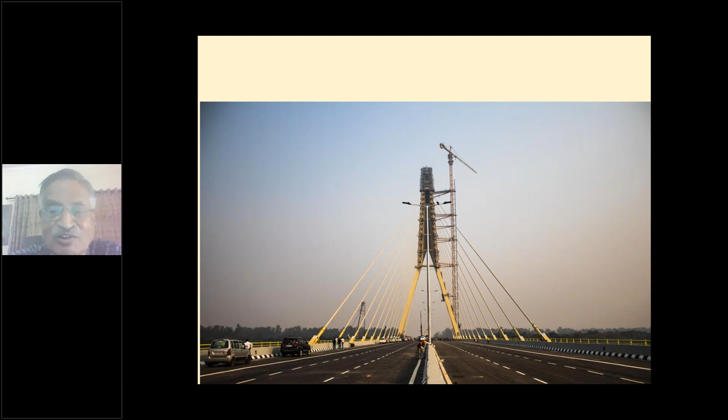And fortunately, without much ado, the project is getting completed slowly. You can see the near completion stage there. Most of the deck is also getting completed. The cables have been completed, of course. Various works are still going on. The top piece is still not there. Even though the top viewing gallery is not ready, the road is almost ready to be opened, nearing completion.

And this is the way it looked at that time. You can see the western approach clearly on the left hand side. The complete western side is there, and on the right side the embankment is almost completely done up to Khajuri Khas. You can see the Wazirabad barrage on the right and the bridge standing up.

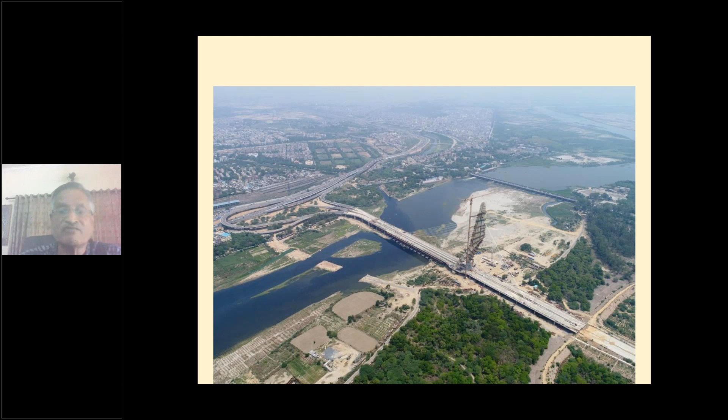And this is the way it will look, as it looked at that time, and the graphics which have been done. It has been done in a very sophisticated way. We tried to create the Yamuna's background, the cultural background of the peacock feather, on this one.

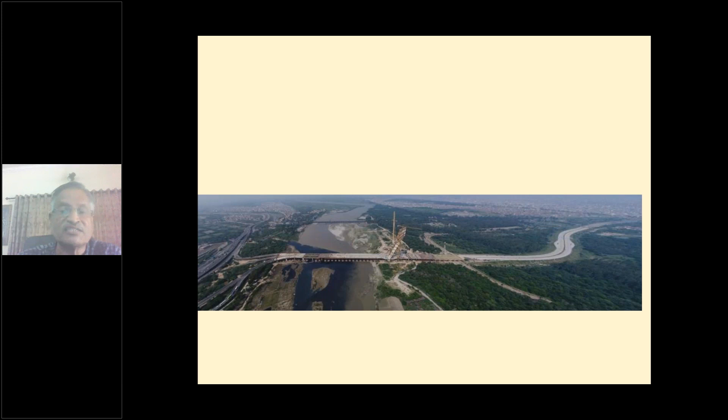So by very ingenious methods, the painting of peacock feathers has been completed, and it is clearly visible there. And it was done before assembly, so you can see them later as it stands today. So you can see both sides of the bridge. When it is completed, an aerial view, you can see them. And now the bridge stands in all its glory, and you can see while going through what feeling

you have. Now you can see there are only two sets of cables. If there were two decks, this would have been a complex thing, because you would see a whole lot of complex cables coming helter skelter. So this made it very beautiful, because once you go through, the cables fly past you without bothering the eyesight. So this was the idea, and this is the advantage of two-plane cables. And you are almost getting the Namaste through.

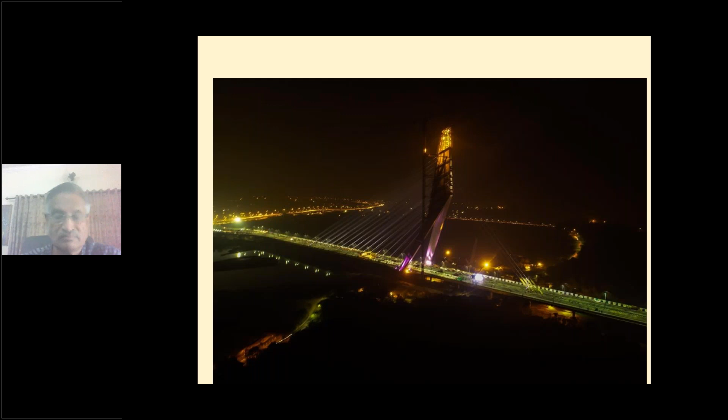And the bridge was inaugurated on 4th of November 2018 with a lot of fanfare and a lot of problems also. The project was inaugurated by the Chief Minister of Delhi on the 4th of November. And the bridge looks like this when lighted. And these are various views of the bridge after lighting. This is you're getting Namaste through. Again, this is the way it looks now.

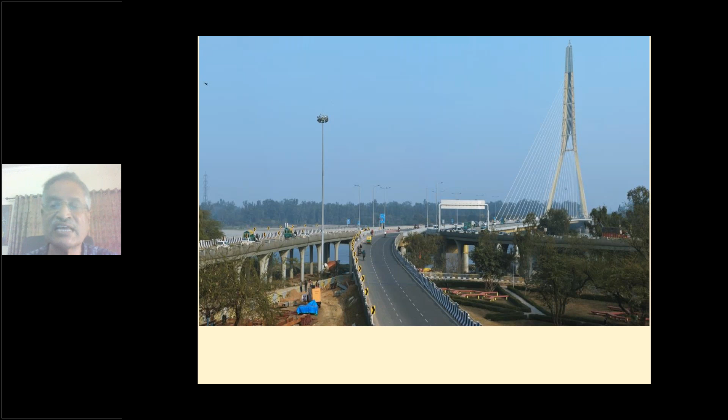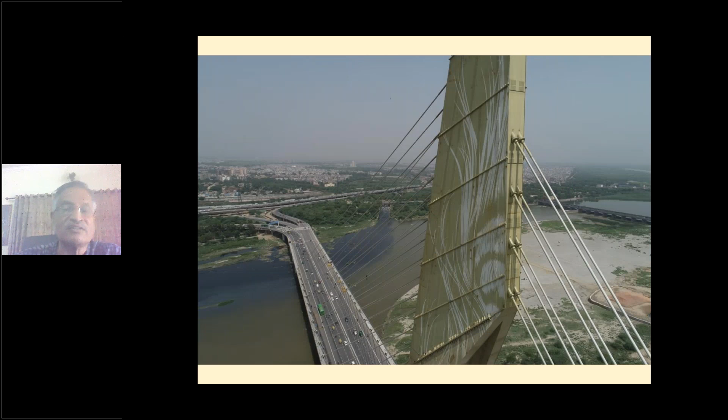And if you look at the cost part of it, I will not go into the actual cost. The foundation and substructure was about 10%, the superstructure cost us about 30%, reinforcement about 7%, steel pylon 34%, stay cable 9%, bituminous work 3%, expansion joint and bearing 5%, glass facade less than 1%, and other miscellaneous work about 1.27%. That makes the project complete. So this is the way the project was quantified.

And hats off to these people. A whole lot of people worked on this one. The basic design was done by Schlaich Bergermann and Partner. I must give my tribute to Jörg Schlaich, who came first here. I told you the story earlier. He was quite senior even at that time, but a very passionate man who spent an enormous amount of time in Delhi and Germany to create this concept. I give all my tribute to him. Tremendous amount of effort, tremendous energy, sincerity. He has created this one.

Then the Construma Consultancy Private Limited with Dr. Subbarao, who created the entire foundation design from India, Bombay. And our friend Ratan Batliboi Associates, a wonderful urban architect who spent an enormous amount of time during the evolution of the design. And his contribution cannot be forgotten. A lot of work has been done by him to get an acceptable design.

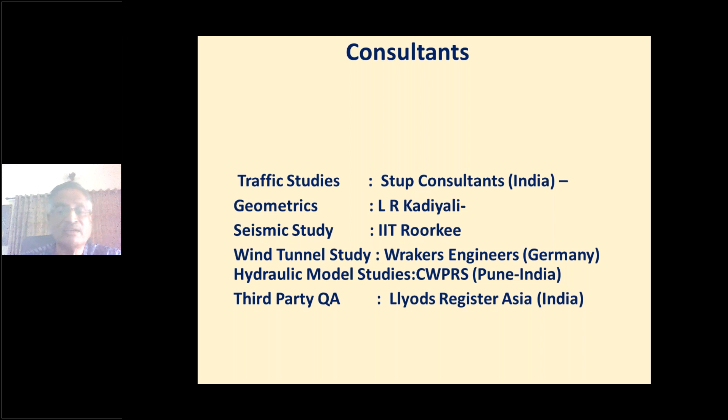Wonderful work done by both in India as well as in China. The fabrication of the pylon and deck was done by ZTSS China. The cranes came from Sarens Heavy Lift. The bridge bearings were from Maurer Söhne, Germany. Expansion joints from Mageba, Switzerland. Stay cables came from Tycsa, Spain, after a lot of difficulties.

Initially, we had to source from somewhere, but the testing failed, so we had to go to Tycsa to get this one. The high HSFG bolts were supplied by TVS Fasteners. We had a lot of discussions with them. They were evolving, and finally they supplied all the bolts from Chennai.

Railing and steel fabrication by Rajhans from UP, and structural steel and other enabling structures were done by Saifi Steel, UP. Specialized agencies were Radeilli, Italy, for railing around the pylon, Graepel platform flooring for the pylon, Kalzip for the pylon roofing, and advanced bolting solutions for tightening the bolts - a very involved and accurate work done by a team.

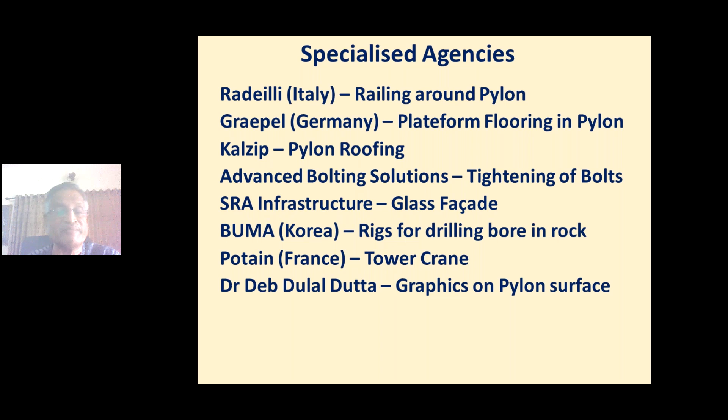SRA Infrastructure for the glass facade, Buma Korea for rigs for drilling into the rock for our famous P23, Potain France for the tower crane, and Dr. Deb Dulal Dutta, who has done the wonderful graphics on the pylon surface - a very, very sensitive artist.

The construction agencies were: the main bridge was a JV among Gammon from India, the oldest construction company in India, Construtora Cidade from Brazil, and Tensacciai from Italy. The approaches were done by Gammon Engineers and Contractors Private Limited.

Lifts were done by Maspero, Italy. Pylon access system by Oriental Engineering Works, and the bridge health monitoring by Mageba again. So it was a huge global participation, involving 14 countries, coordinated by a construction management team. This was the core team.

You can see the proud Gammon head and our project manager at that time, Mr. Bansal, and Mike Schlaich, who is the son and did the main work from Germany for Schlaich. And Subbarao is not there, but his son is with us.

Harsha - we always had several discussions. Some of the toughest problems were solved by his office, like P23, along with our MD at that time and myself, and our architect Ratan Batliboi and Professor Miranda. A proud moment for all of us.

The whole of the construction management, with all these complexities, was done by the engineering wing of the Delhi Tourism and Transportation Development Corporation. I'm proud to say that all the engineers of DTTDC were on deputation from the Central Public Works Department.

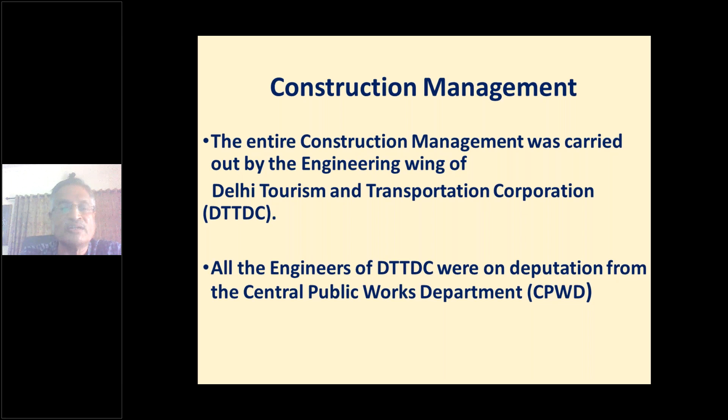So with that, I conclude, and I thank you very much for patient listening. I'm very sure you will not be satisfied because each of these elements requires elaboration, and I had to rush through because of the time limitation.

Maybe some other time, if it is possible, we can meet again and discuss each of the elements, because each one of them teaches us a lesson, and each one was a hard-earned solution to tough problems. So thank you once again for all the attention. I thank QCrete and Shelly Fernandez for the opportunity given to me again. Thank you.

Are we closing or are there any questions? Hello. Yeah, questions we'll send to you. We'll send you the question, sir. Korean sir, we'll send you the questions once it is through. Fine, we'll answer. Thank you very much for the session. Are we closing? Yes sir, we close it. We close the session.